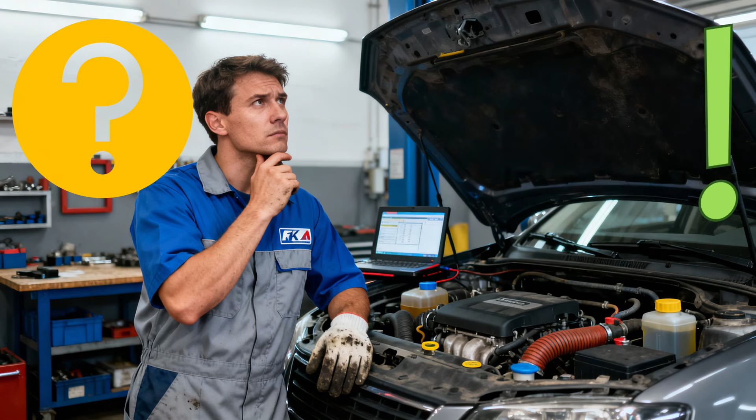Today at Auto Fixx Pro: how does the 7-speed S-tronic dual-clutch transmission in the Audi Quattro work?

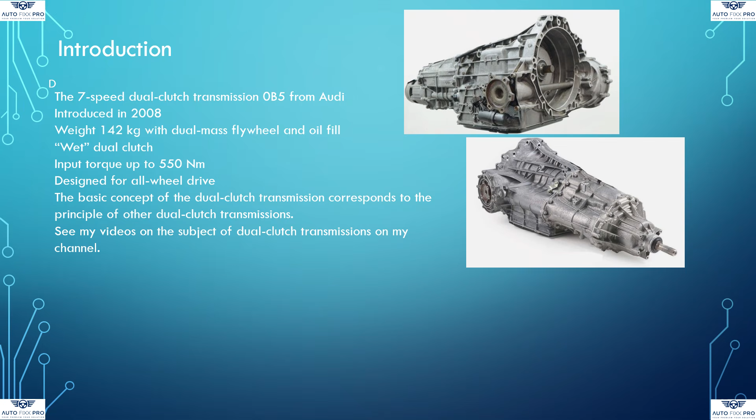The 7-speed dual-clutch transmission 0B5 from Audi, introduced in 2008, weighs 142 kilograms with a dual-mass flywheel and oil-filled wet dual-clutch. Input torque is up to 550 Newton-meters, and it's designed for all-wheel drive. The basic concept corresponds to the principle of other dual-clutch transmissions.

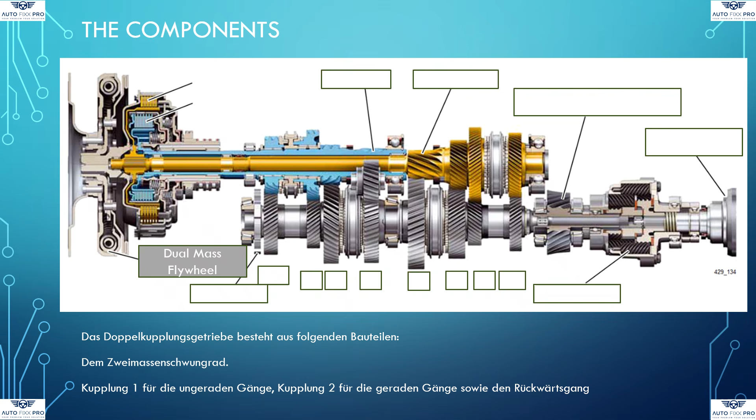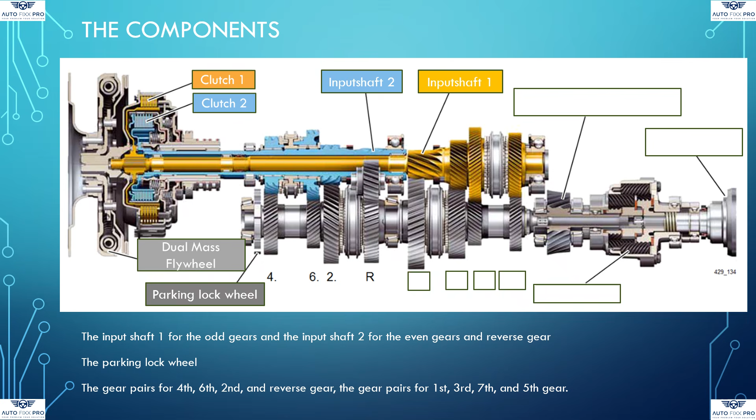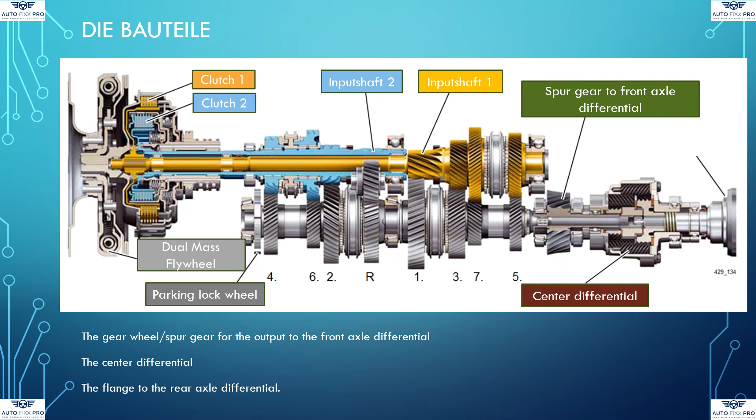The components of the dual-clutch transmission: the dual-mass flywheel, clutch 1 for odd gears, clutch 2 for even gears and reverse gear. Input shaft 1 for the odd gears, and input shaft 2 for the even gears and reverse gear. The parking lock wheel. The gear pairs for 4th, 6th, 2nd, and reverse gear, and the gear pairs for 1st, 3rd, 7th, and 5th gear. The gear wheel/spur gear for output to the front axle differential. The center differential, and the flange to the rear axle differential.

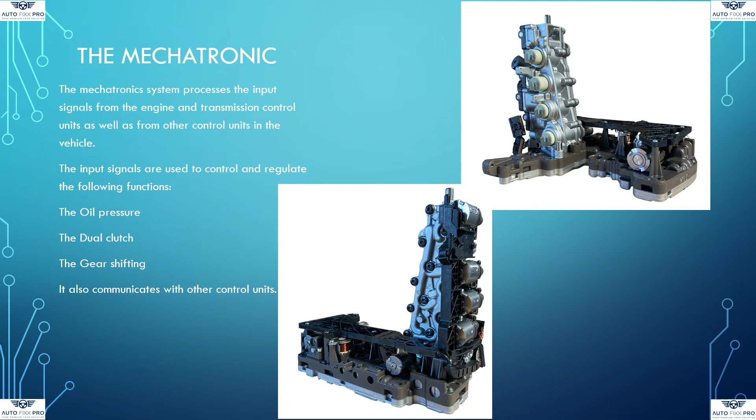The mechatronic system processes input signals from the engine and transmission control units, as well as other control units in the vehicle. These signals are used to control and regulate oil pressure, the dual clutch, and gear shifting. It also communicates with other control units in the car, for example the engine, to get information about engine temperature, engine speed, and more. The mechatronics consists of the electro-hydraulic control unit and circuit boards 1 and 2 with

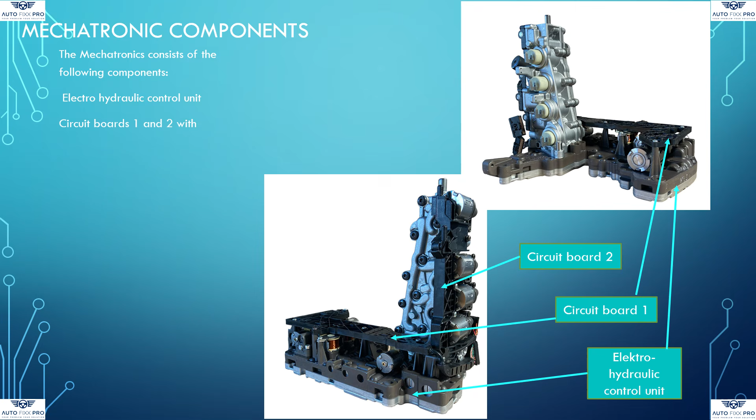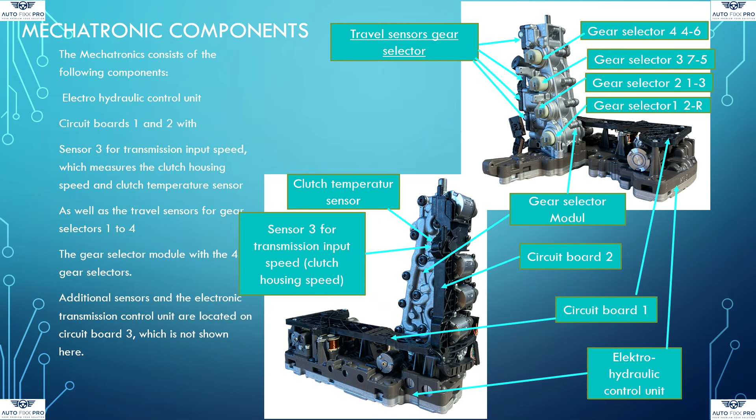sensor 3 for transmission input speed, which measures clutch housing speed, clutch temperature sensor, and travel sensors for gear selectors 1 to 4. The gear selector module has 4 gear selectors. Additional sensors and the electronic transmission control unit are located on circuit board 3, which is not shown here.

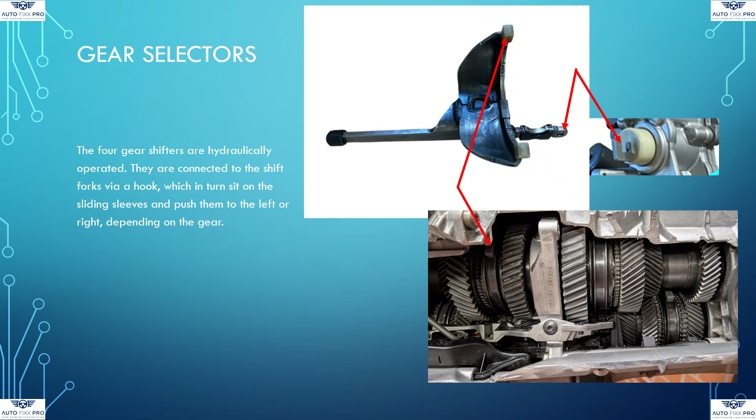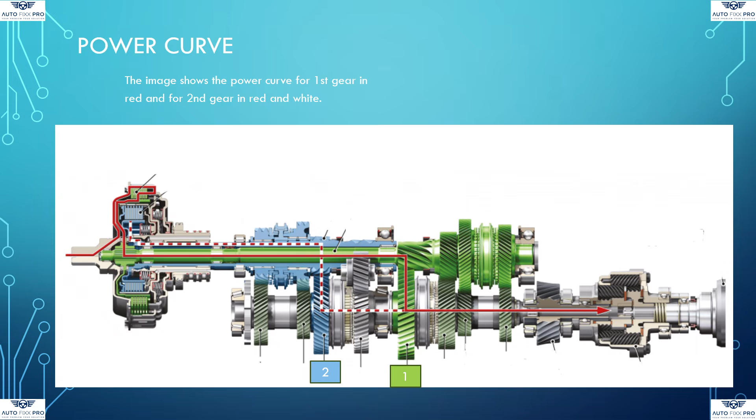To illustrate the function of the 0B5 transmission, we cut it open. Through a compressed air connection, installed as a substitute for the hydraulic lines, the 2 clutches can be operated. In the video, you can see clutch 1 being operated, and the clutch plates inside the clutch are also visible.

When the left lever is operated, clutch 2 closes. Unfortunately, this cannot be seen because clutch 2 is located inside.

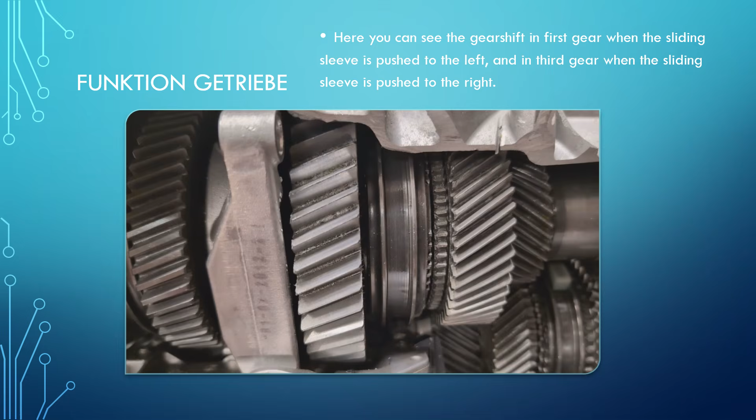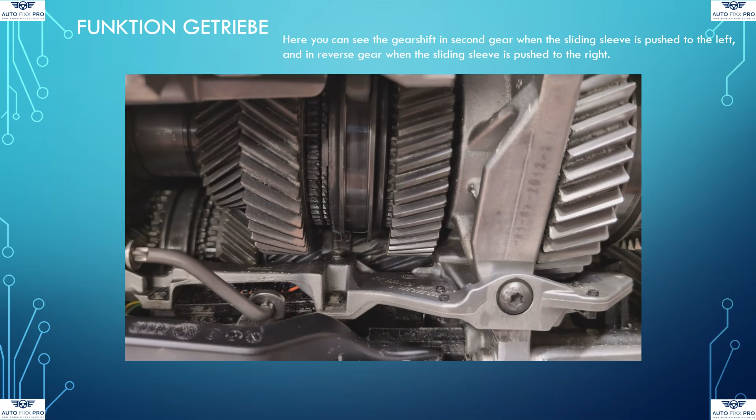Here you can see the gear shift into first gear when the sliding sleeve is pushed to the left, and into third gear when pushed to the right. You can also see the shift into second gear when the sliding sleeve is pushed to the left, and into reverse when pushed to the right.